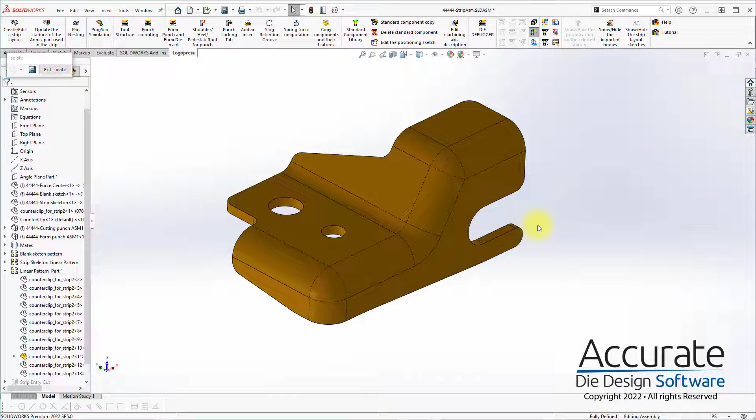So it's going to be a wipe of this main body. And to get there, we're going to start cutting it out. We've got a little Z preform. We've added this tab to the blank here, and to do that, you were going to bend that downward here to hang on to the part. Same thing on the back of the strip here, actually.

And then we're going to use those both as hold points to hold the part as we wipe down here so it doesn't pull everything. Then we'll cut that tab off. We will cam pierce our tab. We'll pierce our two slots, and finally we'll cut the part off.

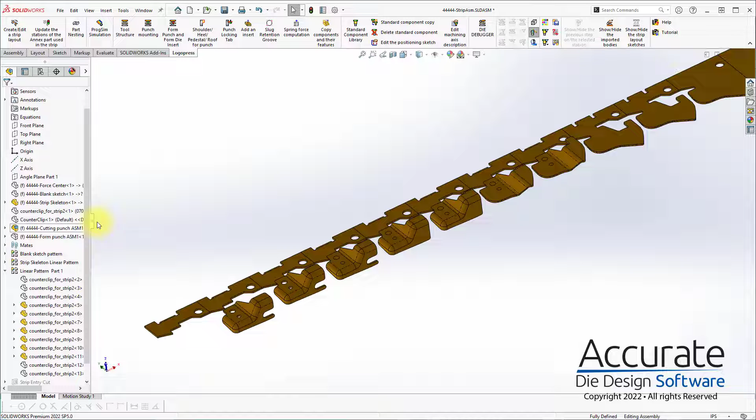There we go. Doing the cutting in just one main block here with little punches on the ends. These are just sticks for simulation purposes. They will, of course, be purchased punches later. And we've got our form punches here as well.

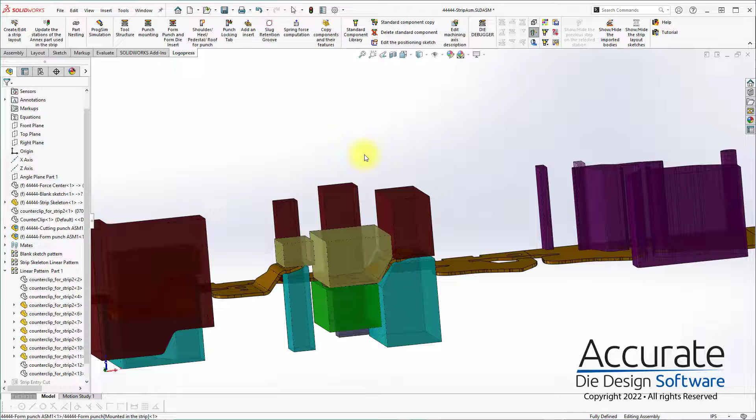The red are the form punches, the teal are the form dies, and then the yellow and the green are pads.

So we are going to start ProgSim. And it's going to go through all this strip here, and it's looking for all the stuff that was created in the Logopress strip layout.

And so it's going to be able to pick up that a lot of these form punches are indeed form punches, and the form dies are form dies, and that kind of thing. But we need to go through and make sure what it picked out is good, and add to it what is missing and take away what is not, as well as fill out some things it just doesn't know about.

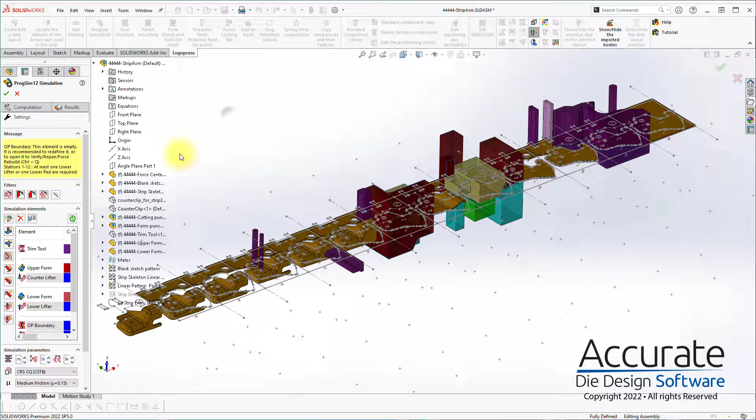That's fun. Let's hide. I'm gonna have to hide these sketches. Can I hide that for now? No, maybe not. There we go.

All right, so it's pre-populated some of this list, and then it's left gray on items it hasn't even tried to do. And then we're going to have to go through the side here and add a few more. But the main idea is that we are trying to incorporate all of the faces of tooling that is going to actually interact with the part.

Everything that's going to cut it or push on it, we want represented here because this is a real-life simulation right down to gravity. It's giving... We're going to kind of start at the top here and work our way down, kind of just like SolidWorks.

It's giving us some warnings at the top here, saying stuff's not defined, there's no lifters or anything like that. But there is not, then we can kind of come on down and we're going to go through the rest of the list.

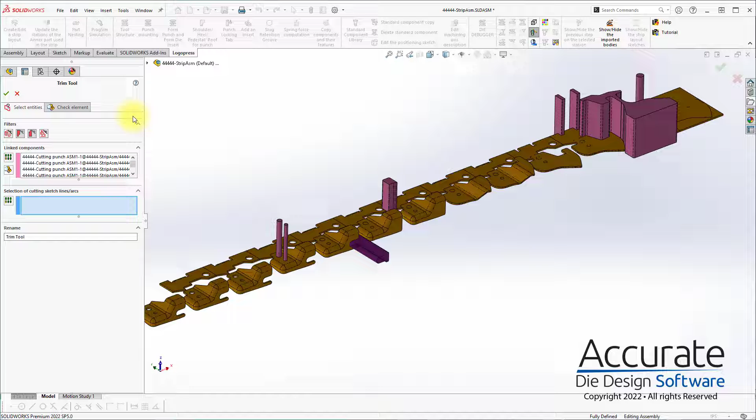So we're going to start with the trim tool, and it's picked up all these cutting punches. It's identified this cam punch is not a regular cutting punch, so it's not included it. We can go to the check element tab and see that it's doing everything that we actually want it to do. Those cutting punches are there, so we can confirm it. And we can come back to the list, and we're just going to keep on going down through it.

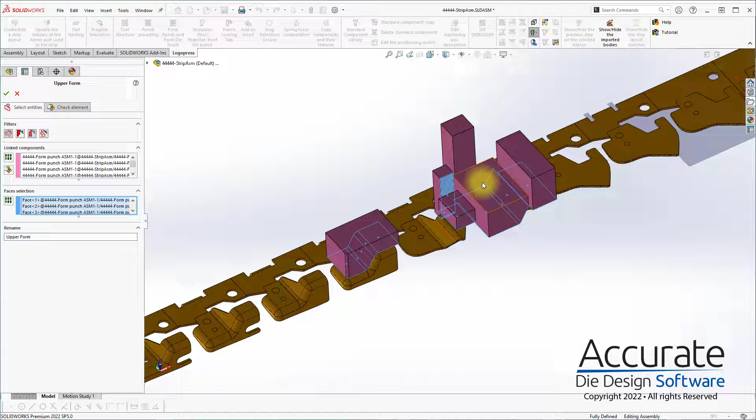Go to the upper form. It's picked up all of these bodies because they were all created with the form punch tool. And it's actually missed the big white punch here just because I think of the way that one was created. So we need to go through and we need to remove the pads from here. So that's a pad, and that's a pad.

And we are missing, we'll go into our tree here, one of these. That was made towards the end, is probably this one. Yes. And that. And again, we can go into the face selection here, or we can go into the check element and see that it's got everything.

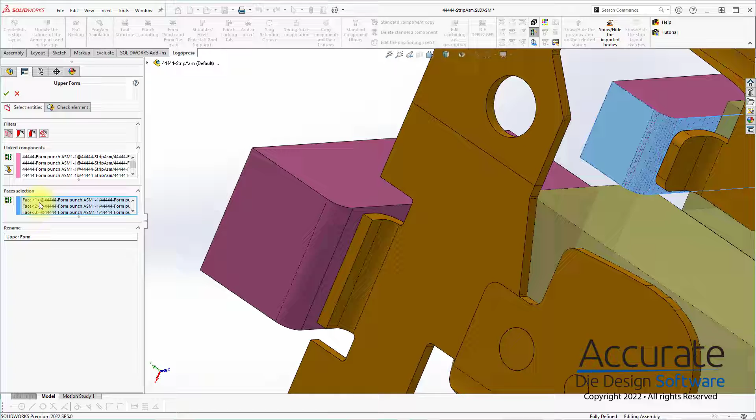This is good, this is good, this is good. This punch was missed entirely, so we can go back to select entities, we can pick up those faces into this bottom face selection area here. And we're looking for everything that's going to contact the surface.

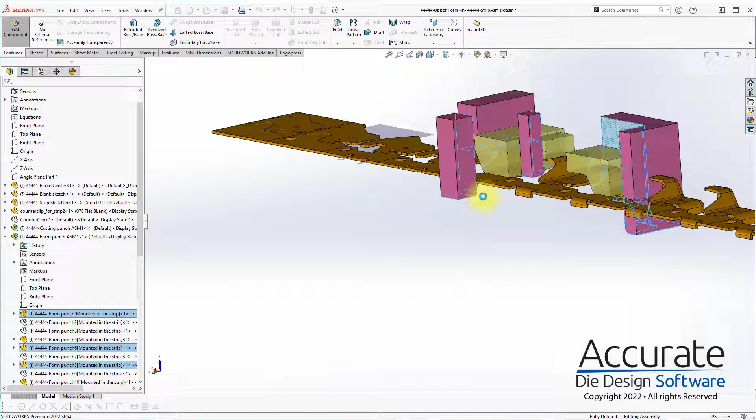Adding more is going to increase the computation time, but it will still work. You want to make it as minimal as possible just for the sake of performance. So we can make sure that those took. We do indeed have all of our punches now, and confirm.

I'm going to skip the counter lifter for now. I'll come back to that in a second. I'm going to do the same thing we just did with the lower form.

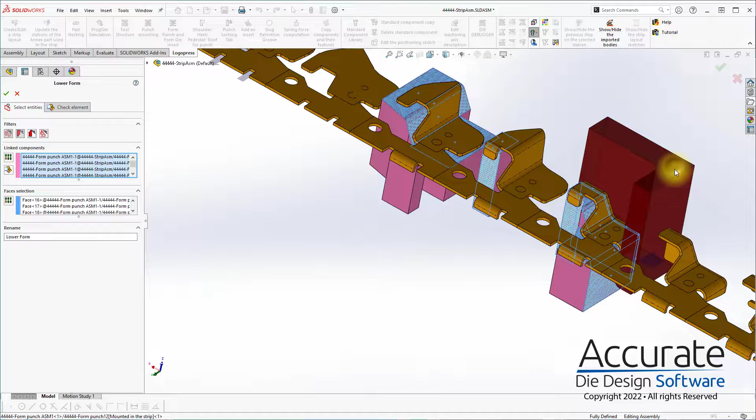This is where that form punch that we need for the upper is actually up here. So we're going to deselect that because that is, of course, on the lower. That's a punch. This is a pad, so we're going to deselect this.

And we can see here on the selected faces, this punch has not been touched at all. And I think I'm going to want this face here too. So I'm going to go into here and pick that, and we're going to get these three. And we'll check what we have.

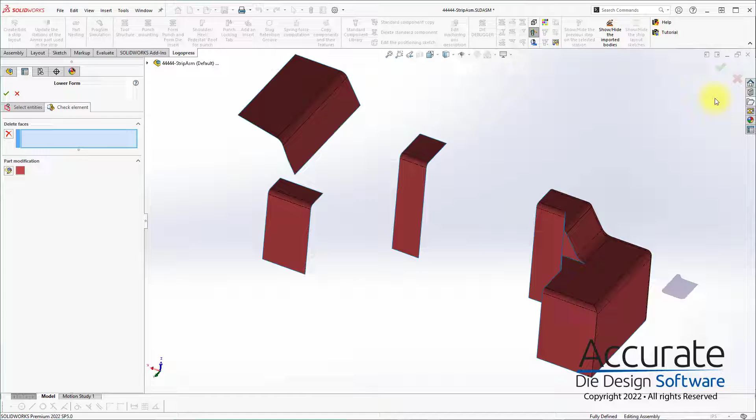This is good, that's good. If you were worried about the material pulling against this edge, you would definitely want this triangular face here if you were actually going to make your punch like this. But there's no reason for it to pull against that, so we're not going to bother.

It's not as bad as some of the old forming simulation where an open edge was basically a razor blade and it caught everything. We'll hit confirm.

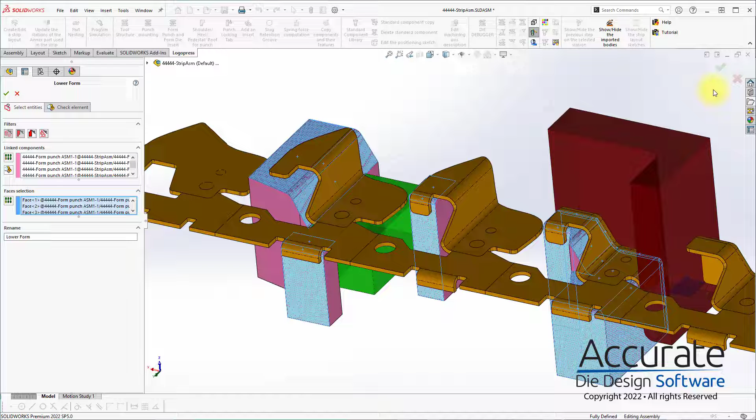We still need to do our pads. I'm going to do the counter lifter and the lifter right now. These two are linked. They're going to be the same thing unless you go in and try to mess with them, but there's no reason for them not to be the same thing.

So you can double click on either of them, the counter lifter or the lower lifter. Makes a lot more sense to think of the lifter though. The counter lifter is more just for the software.

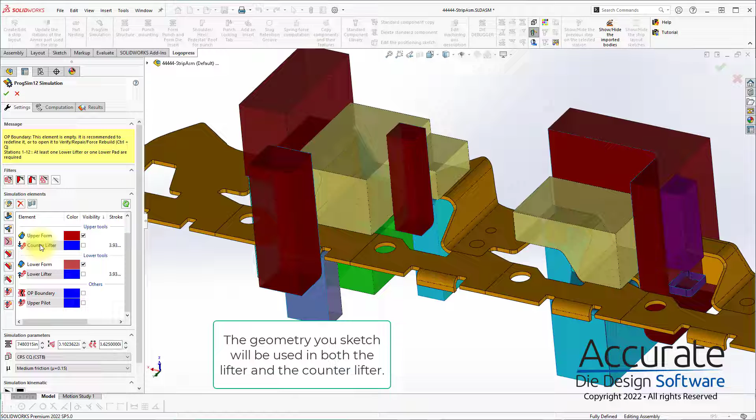It's going to pinch the material and hang on to it. It's mostly just a simulation tool, but it does need to be accounted for because it cannot touch the formed areas. It's going to ask us the first time what we want to call it. I can just accept, and then we can look at this, just use normal to.

And we want to draw a lifter here. We could go through and put little lifters where it's going to be, but it's easier and faster just to put a rectangle down on the carrier and say just hold on to the carrier. It does need to be on every single station.

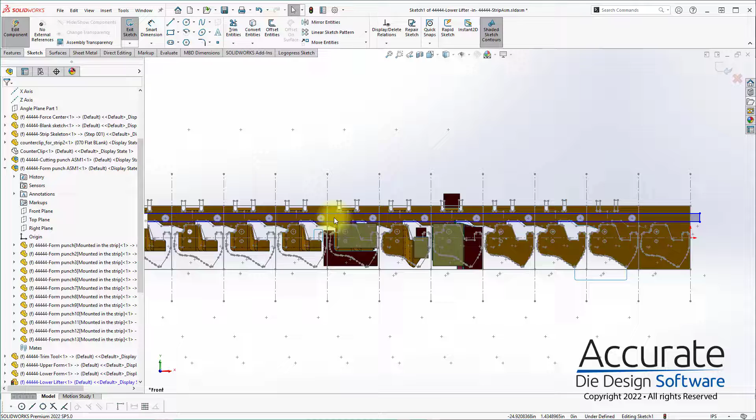It could use a pad in the lower and the upper instead of the lifter, but it's usually just easiest to put some lifter in, down past it on your carrier, straight down. It can be on the pierces where all the pilots are. It can go through cutting. It doesn't matter, it just cannot touch any formed areas.

So I'm going to put this almost out to the tab over here, and I'm going to put this almost to this tab over here, and it's just going to hold on to all the material it can. It'll make it more stable.

The only thing we have to do here is that there needs to be, in the first station, just for the purposes of the simulation, something on both sides of the center line. For this...

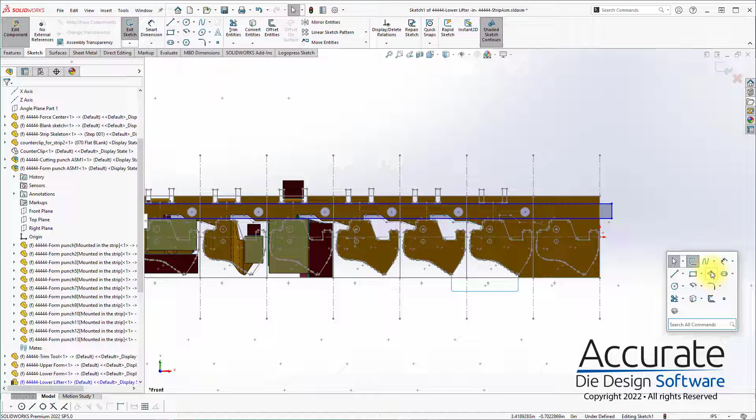Because the carrier is off to the side, it's not centered on the part, that means we need to add a second rectangle here in the beginning. We're going to stop it as soon as it starts forming though, just run it about there and that's fine. I could constrain this and all that, but frankly it doesn't matter.

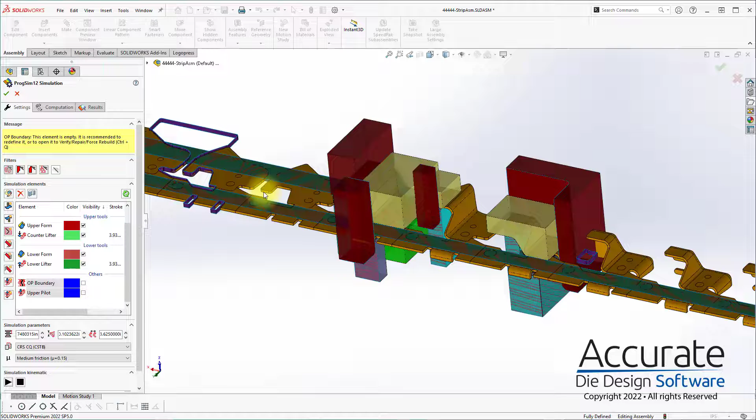So it's added our lifter here. You can see it's going through the cutting and that's fine. It ends before the form, and this one sneaks between all the forms. Real close there.

Last two things here in the tree is the operational boundary. I'm going to hit OK on the name here. This simulation is going to simulate your entire strip one station at a time, and so we are telling Logopress where to divide the part, where to have each simulation chunk be.

We could just make it a rectangle, and that's fine, and that would actually work for this part. But for more complex stuff, being able to define exactly where to go between the parts is better. We could, if we wanted to, run the boundary up here to try to include this pilot with this station, if that was better for what we were doing, depending on how we thought it was going to pull.

But we're not really too concerned. The one thing we do want to do here, though, and again this is for a simulation thing, is that we want to have a little jog in the line somewhere in the carrier, just to kind of lock it together. This is just a simulation thing, and I'll show you what I mean as I sketch here. So this is going to be retained here and locked here.

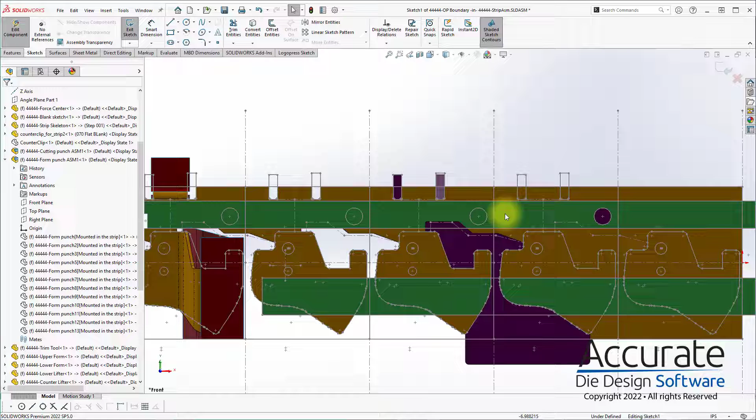We're going to keep it back with that. I could just go straight across here, and I do want it to be the full width of the strip. This is also going to define the width of your material in the simulation, so if your line was short, your material would be narrower. If you wanted to make your material narrower or wider, you could make this line shorter or wider, and that's fine.

But the only thing we're going to do here is make sure that we have this. I'm going to go well back from here, so we're going to put a little jog in here in this carrier area. What I mean is I'm going to go over a little bit, come back a little bit, then go down, and there's now a jog in here. I could even jog a third time if I wanted, and I just kind of want to come through between these, so I might as well.

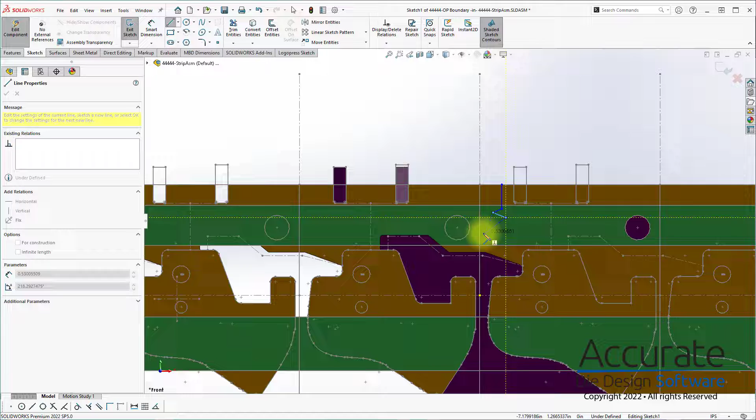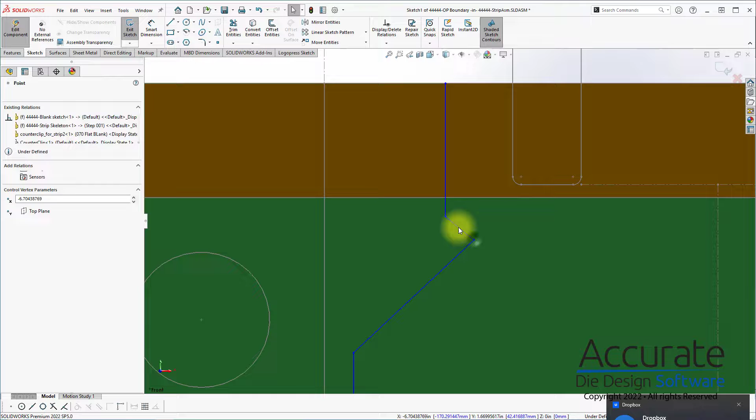But the idea is that somewhere in this carrier, we need to prevent it from slipping. It might be a little cleaner if you want to be perfect - we could come in and we would only need the one bend this way, so that might be the better way to do this, a little thing like this. It doesn't need to be any particular dimension. I could probably make it really tiny and it probably wouldn't matter. But we're just trying to create a divider here between the two, and we need something to trick this into not moving, so I'm trying to put this little divider in between.

Oops, we don't want you. Come on.

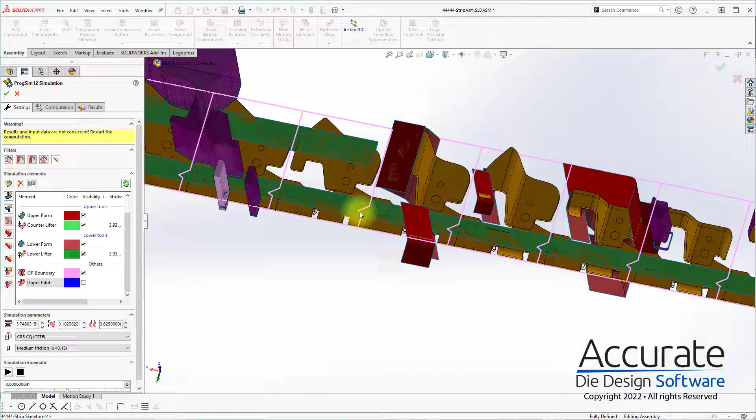I want this somewhere in the carrier - that's all I'm going to do for it, though. That's one of those that only matters when your part is only carried on one side, because of gravity this part would tip without this little lock here, and you can actually play with that and watch it fall off the carrier or off the lifter if you want.

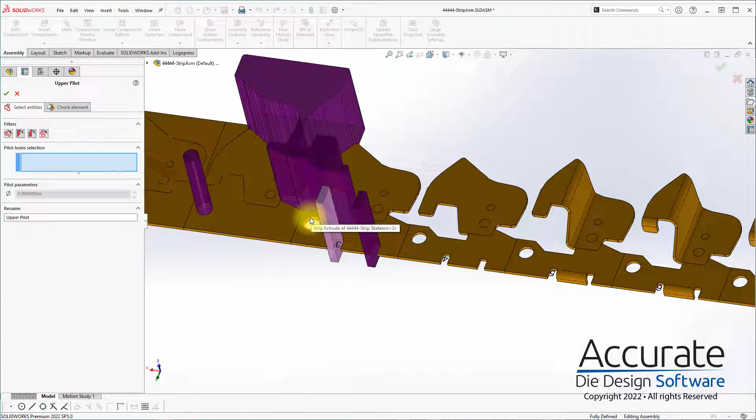Okay, the last thing here in the list is the pilots, and this is just asking for a hole where the pilots are going to be. We're piercing our pilot down here, and it's got a feature here. If I hold Control and then select the edge of a patterned feature, it's going to grab all of those patterned features until they stop existing or are changed, and you can see it goes all the way down here because there's nothing interfering with these pilots the whole way.

We can go ahead and hit OK. It's picked up the correct size from all that, so it's nice and automatic there. You could deselect if you don't want to use it in some stations and all that, but those are now there, and so we've got all the basic features that it's asking for.

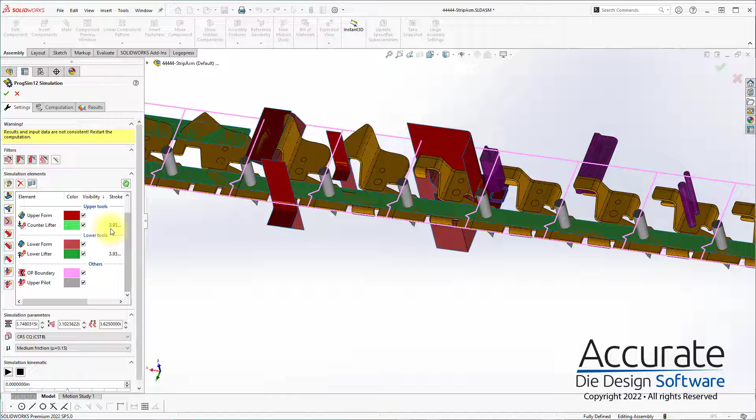We still need to put strokes on for the lifters, but more importantly we need our pads here.

I'm going to add the upper pads first.

The pads can be done individually if you want, or they can be done all together, regardless of whether they're bolted to a single stripper or something like that. It's still going to be computed individually, so all the forces are still going to be individual, and you'll still have to put them together. So there's fundamentally no difference as long as you're making the same style of pad.

In this case, these two pads are pushing against form dies beneath them, and so they could be made the same, in the same single punch or same single form pad, or they could be made separately and it'd be fundamentally identical. This pad, however, is pushing against this lower pad, so it's technically a different type of pad, and must be made separately from these two. So I have the option of making this one pad, and then I could either make one pad that includes these two, just because it's faster, or I could make them separate if I had a reason to play with them individually, put a ton of force on one or something like that.

So we're going to start just at the beginning, strip work down in order here. We're going to pick the component we want - it's smart enough, you see it picked up those faces on the bottom here in this list. We're going to tell it how much the stroke of this is - it's got an inch and 5/8.

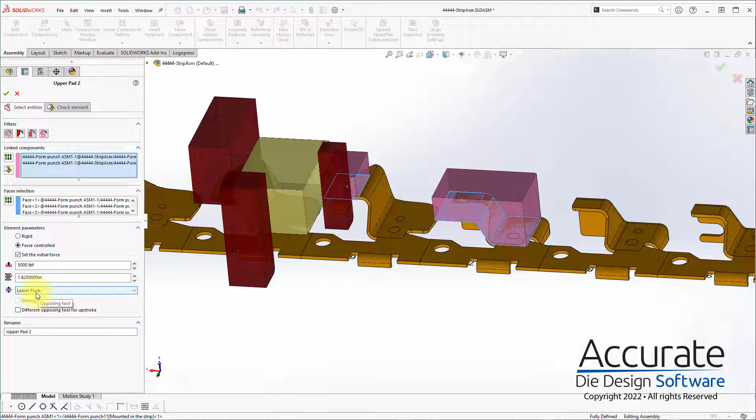And then finally, we need a pad on the bottom here that's going to hold this as we go down. So we are going to go into the lower form, or lower pad element, and we're going to grab this block. It's got that face automatically.

This is only going to get 1,500 pounds. It's got 7/8 of an inch of travel. Nope.

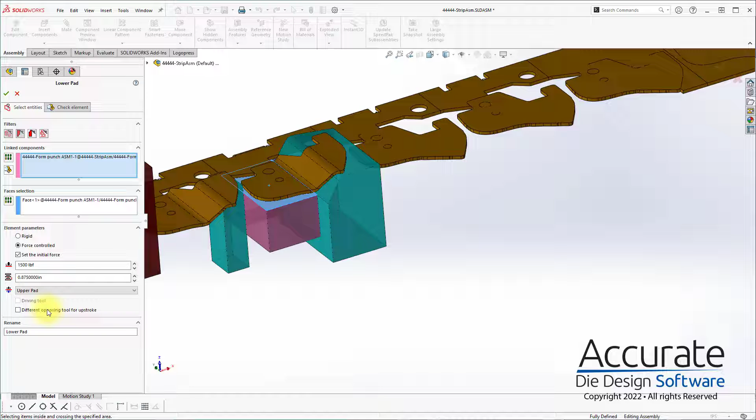And this actually picked this up already because it's directly above it, that it's going to be pushed by, or it's interacting with the upper pad. It is not the driving tool, so it's smart enough to do that. And this one is now good.

So the last thing we need to do here is go back to this upper pad. We can just double click. And this now has our lower pad here to push on. It switches to driving. I was smart enough to do that now, so that's cool. And we can confirm.

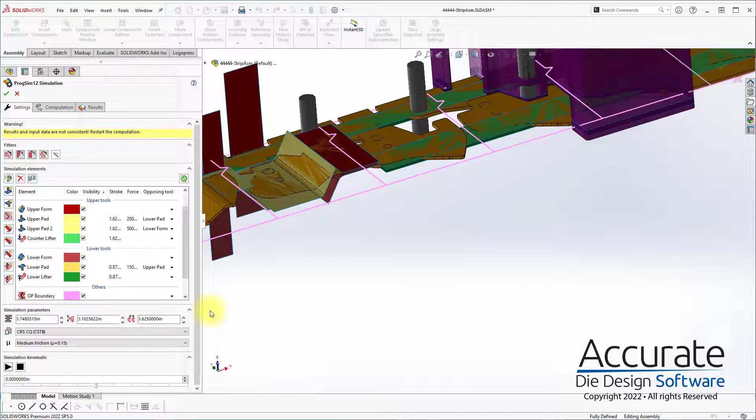The last thing I'm going to do here is make our lifters just match the pads. That's the easiest thing to do. There's sometimes when you might not want to do that, but when you can, it's the simplest and most straightforward, and you'll find out when it doesn't work.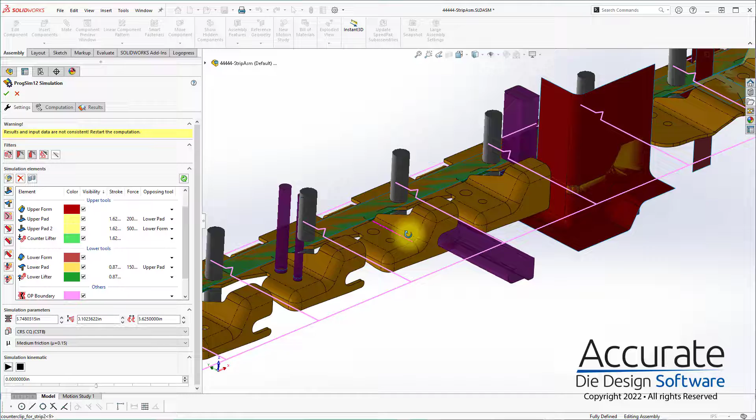But be aware on the forming ones, it says upper form and lower form, but it is not talking about being lower as in attached to the lower assembly and upper as being attached to the upper assembly or the top half of the die. It is talking about which half of the, or which side of the material it touches. This is especially critical on stuff that you bend all the way over.

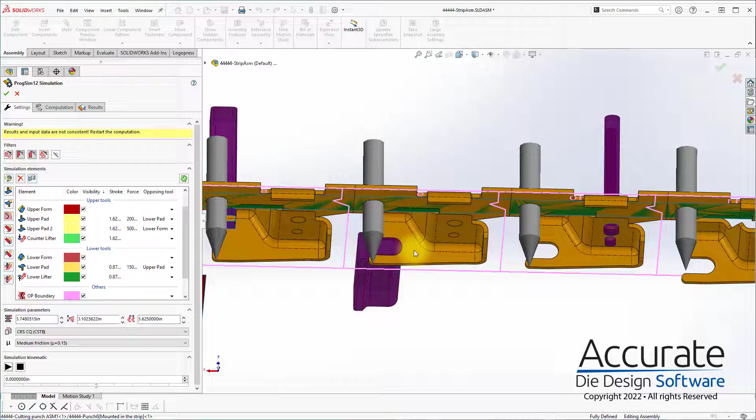Because this is the top side of the surface, something coming from the outside would be an upper form. Whereas if I was coming from this side and I was hitting this side of the material, it would be a lower form because this is the lower side and it's tangent over the way to the lower. So this is the lower form here. Just something to be aware of if you're doing those forms.

But back to this one. So we are going to add our cutting cam punch. And we'll pick the body, and we'll see if it picks it up here. Oh, we need to select the plane perpendicular to punch direction.

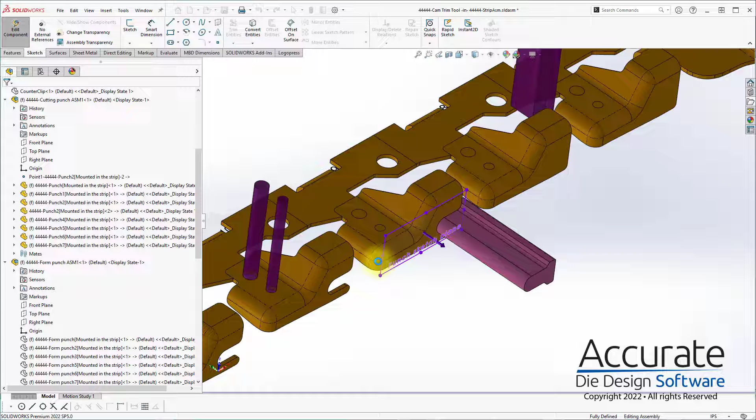You can usually just pick, actually it's convenient. If you make it with Logopress, you can pick the plane for it. There you go. Otherwise, you're going to have to pick, it's better to pick a plane, but you could pick the face of whatever you're cutting, especially if it's coming in at a fun angle. We'll see if it picks up the sketch of that punch. It does. So we are good to go there.

See how I flip that arrow by clicking on it, signifying punching direction. We'll hit OK.

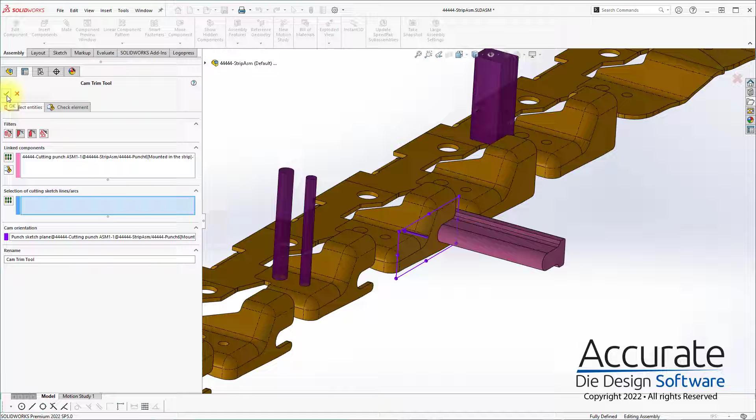And last we have some parameters down here. There's the press stroke, around 6 inches. Picked up our strip material thickness and our stroke. This is just cold rolled commercial quality steel right here, and the medium friction is going to be your correct choice the vast majority of the time.

You're going to be doing some really high lubrication to get in the low friction zone, and some really aggressive nasty stuff to not have any kind of lubrication at all left. Yeah, you'd be running dry for sure.

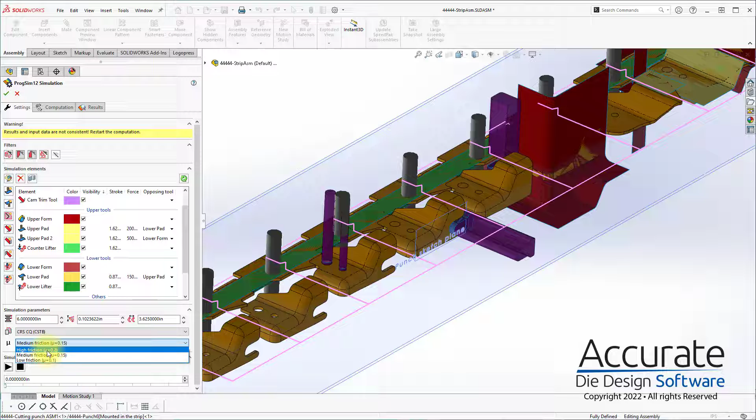Last thing here is the kinematic. We can put it in motion, make sure it's doing what we want it to be doing. See here, my cam cutting is actually coming the wrong way, so I'll go in and change that. We can see our pads and everything are traveling how we want them to.

So pause that. Go into my cam trim tool, flip that arrow that I hit before. Let's try that again. And we'll hit play. There we go. All right.

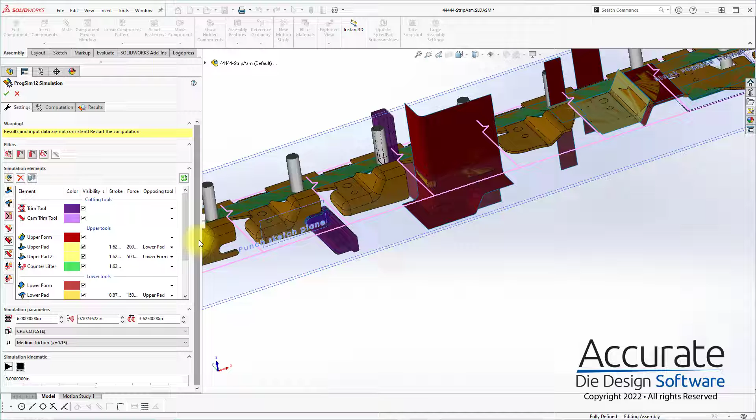Believe we are all set up here. That data not consistent just means that basically the results don't match the simulation stuff, and the fact that there's no results definitely doesn't match what it's got here then.

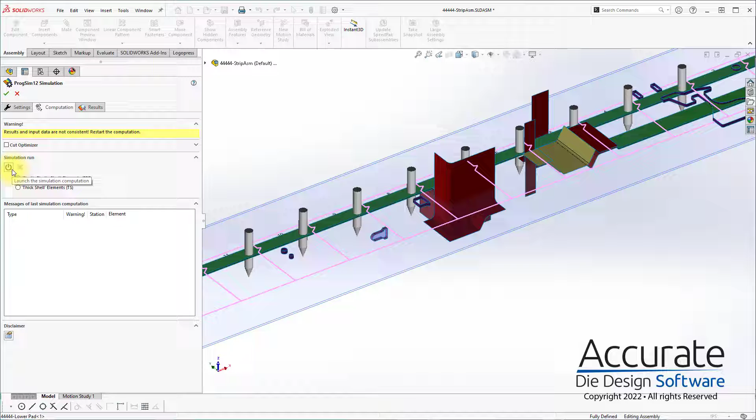So we are going to go ahead and launch, and assuming this works out, we will dive into the actual use of ProgSim's cut optimizer to change this blank.

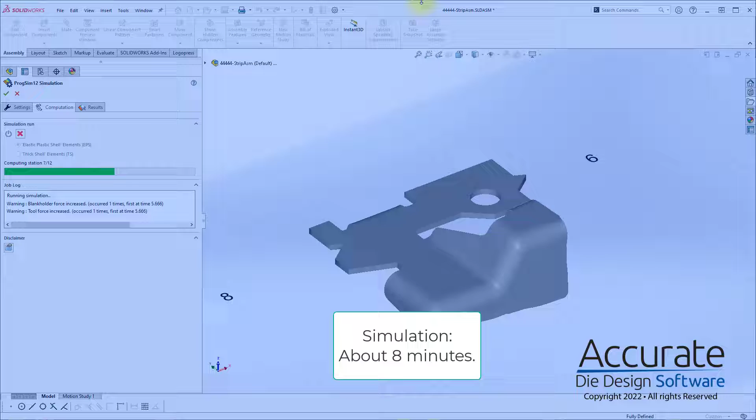Alright, so our first results are in. Looks like our punch is missing the end here just a little bit, so we'll need to shift that. But see our initial guess at a punch here, a little extra material pulling in that corner. We're trying to get that to come straight and straight. So otherwise, the simulation works. So let's go fix this punch.

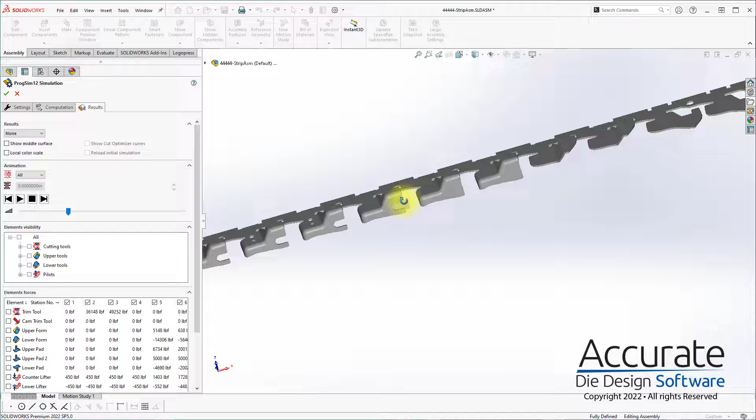And then let's get the punch optimizer running. Well, first, let's take a look at some of the results here. You have this menu to display 8 or 10 or whatever different results plots on here. The formability is your most basic one.

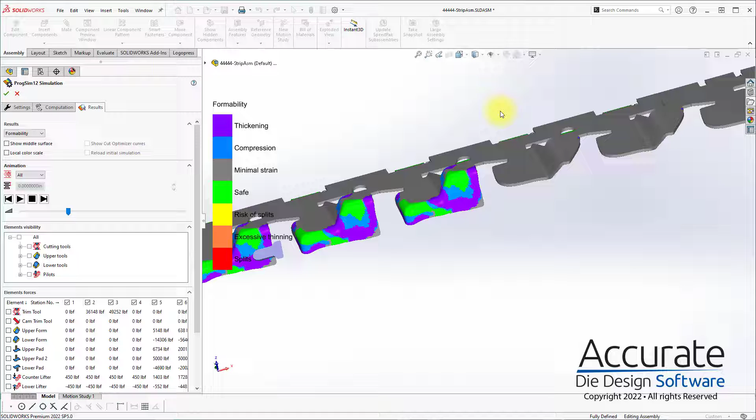This is the standard. This is great to show people because it's very finite. Can I get it onto a light spot here? Very finite result. There we go. They're just color categories. There is no wishy-washy betweenness here on the colors.

It's purple, there's thickening going on. It's blue, there's compression. Green is safe. There's a little bit of stretch going on here. It's going to hold this shape real well. Risk of splits is getting pretty aggressive. Thinning happens more on the high stretch materials, and of course splits. There is no red here, so that's nice to see.

Have a thickness. Show you 74 thousandths at the thinnest spot and 120 thousandths at the thickest. Can also do that as a percentage.

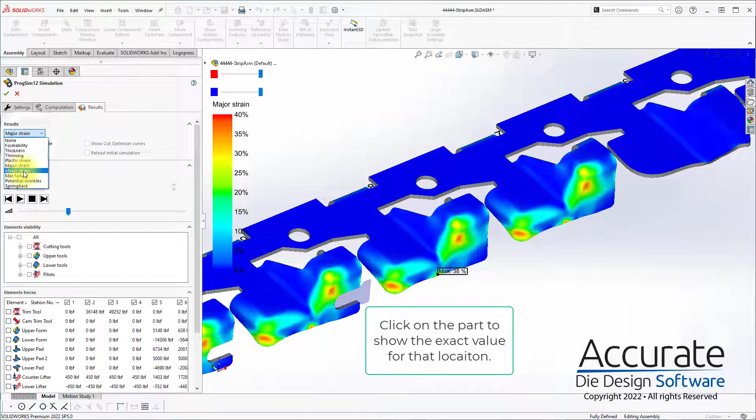It's plastic strain, percent of material that's actually deformed beyond springback. Major strain, stress of the material in the main direction, and the stress in the minor direction.

Together these come up with your wrinkling factor. That's where this chart comes from here. Predicting there's potential wrinkles here up to 0.03 on the scale, which is not that high. This doesn't mean that it's going to be wrinkled and folded over. It just means that there's forces in the area that are going to try to do stuff, and you'll often see the results in the surface not being perfect, assuming it's tied down well enough not to actually wrinkle.

This max failure that I skipped over is actually the partner to the formability. So this is the very cut and dry, this is what it is. This is the numerical value of what this is. And it's going to show a chart pretty far through here as far as the failure and the splits go.

1.0 on the chart is a failure. So the fact that it goes to a max of 0.84 means we're not going to fail this part, and that's fine. But you can get a better idea of how close you are to failure. At 0.8, you could push this a little farther and you'd still be fine. It's especially good to know when there is failure, is it a 1.01 or a 1.2 or a 2.0? You could come back from something close, but when you get up past 1, 2 or so, you need a new idea rather than just some massaging.

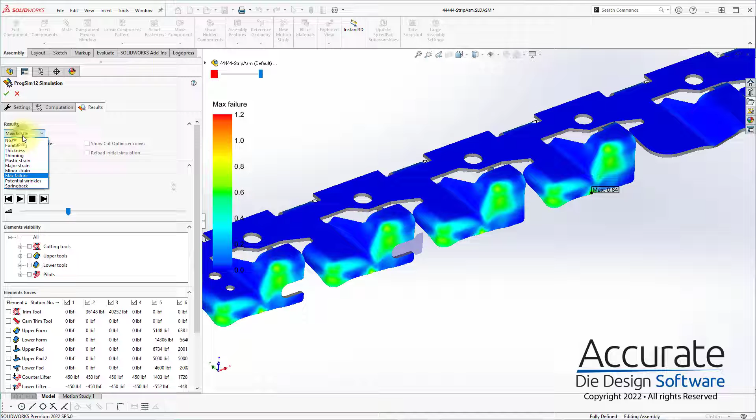And the last plot here is the springback. It is showing the local springback on that station. That's why you see more springback here than on this station. It's just what's happening in that station as the press closes and the forms come back. And this is also compared to the closed state of the tool, so this is not measuring from your finished part. This is measuring from what this was when the die closed to the die opened.

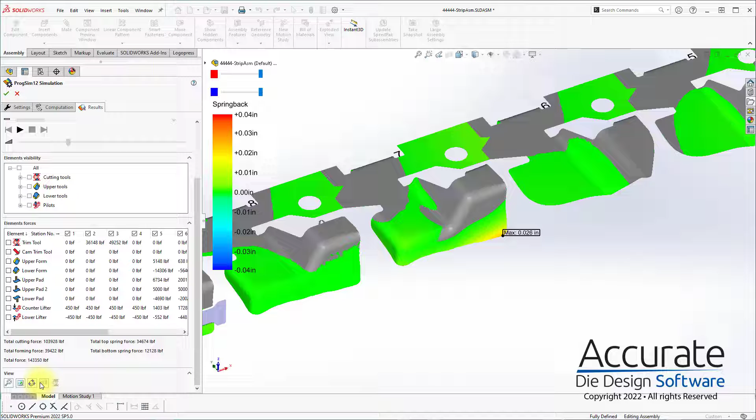You can align the part with these springback adjustment points. This is kind of like on a check gauge. We can say that the carrier here is going to be flat, and it'll align the part to show you, if these three points are on the surface plate, where's the rest of it. So we could do that again, align it using these as our reference points. Reset. So we can come and adjust, and that's now our reference point, and that's going off. Makes more sense on flatter parts where you're going to have that kind of thing.

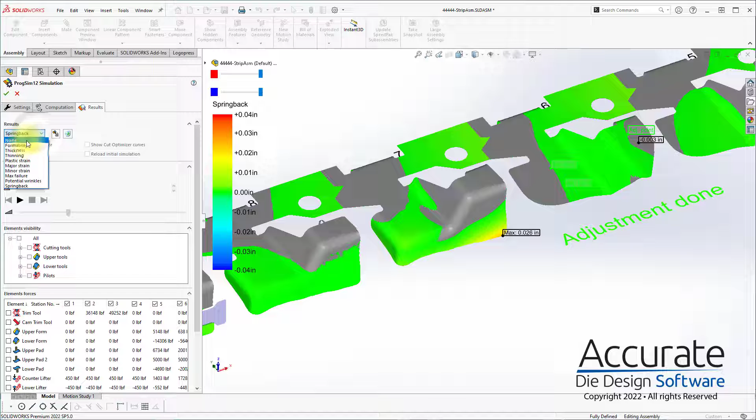There's 2 main display styles. The show middle surface is the actual mesh that's being simulated, versus we can have it show an approximated thickness for what it is. It will actually make this thicker and thinner going through here, but this is just an approximation. This middle surface is what the real simulation is running, and it's accounting for the thicknesses.

Local color scale will adjust your chart here. Let's go to max failure, this will make more sense. So the default is 0 to 1.2. If you do local color scale, it'll show you your maximum is about 0.8, 0.84. So it's just going to go from min to max, and you can see the range is a little more extreme now that our max is 0.8 rather than 1.2.

Also useful for like thinning. New local color scale, and it'll adjust it to match.

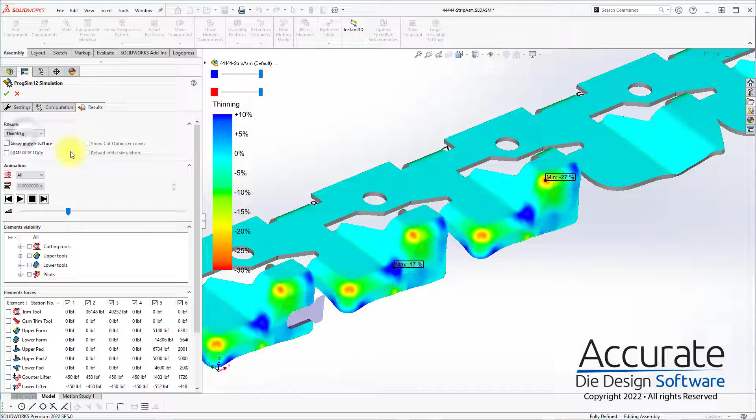These last 2 are going to be used with our cut optimizer. We have a play option here. We can either ask it to begin playing the die at the first station and simply go through everything. There's a speed toggle here so we can go a lot faster, and we can watch it go through every single station.

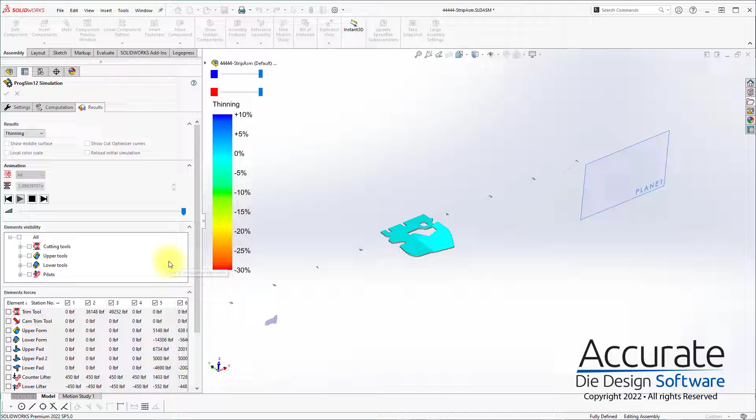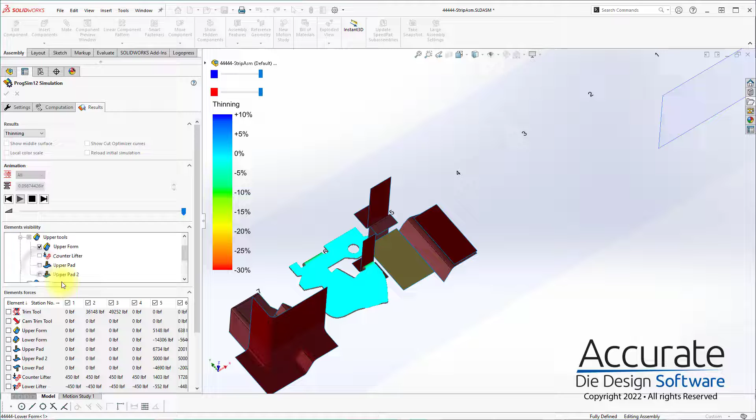Toggle your tools on and see what it's doing. You can go individual tools too. You don't need to see the lifter. Turn on your upper, get rid of that lifter. Turn off that pad. See that getting wiped through there right now.

So like I said, you can either let it go through it all, or you can just pick an individual station and hit play. It's going to start from the bottom, lift up and go through the lift cycle, then go through the drop cycle. It'll keep going through this, get to the bottom, and just lift up again, showing you that one station.

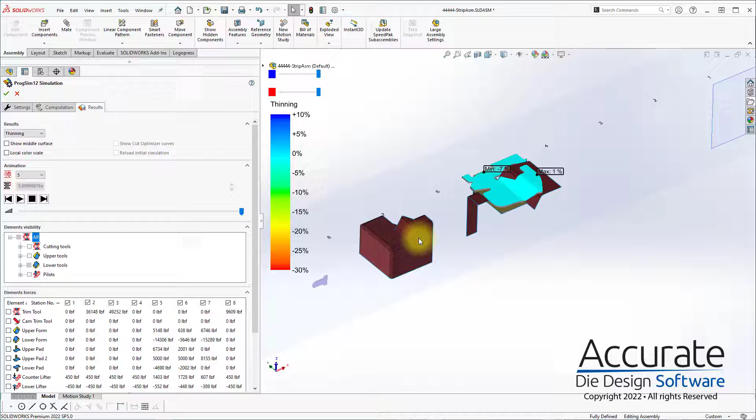So that's how you can display the tooling here. You also can display forces for the tooling. Go on the lower form here. If I check that, it's going to show how much force is on the lower form. It's 15,000 pounds

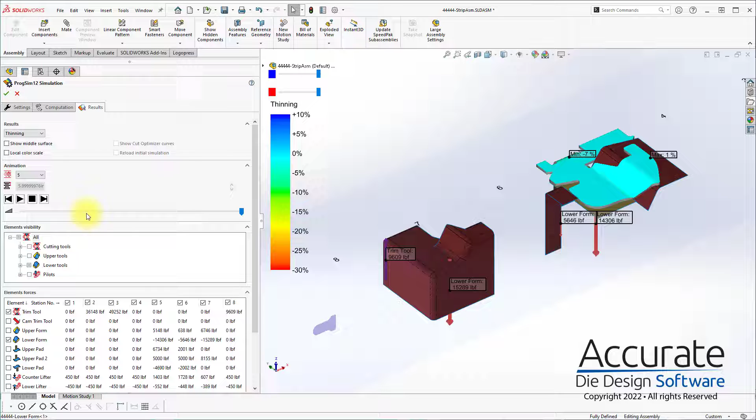All right, so let's go, we're going to stop this, and we're going to confirm. We're going to go fix that punch.

Oh, what do we need? Let's do... should have measured it. That's more than we need. Let's try that. Close enough, right?

Okay, let's save what we did.

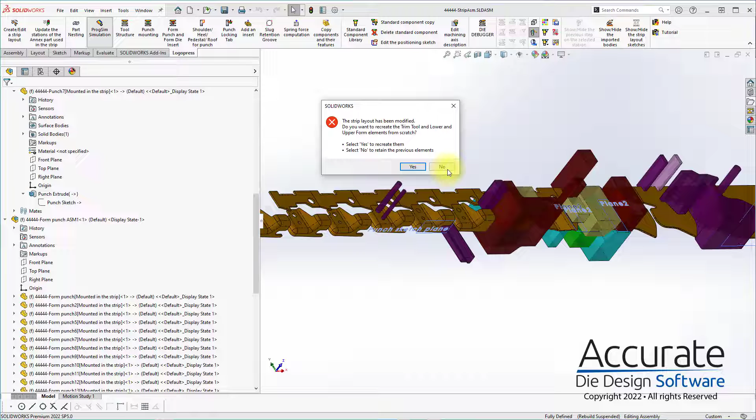It's going to ask if we want to recreate everything, and frankly this warning is dangerous. We do not want to throw out everything we did and recreate, so we're going to hit no. We're almost always going to hit no, unless you're planning to start from scratch. There's no reason to ever hit yes on that button.

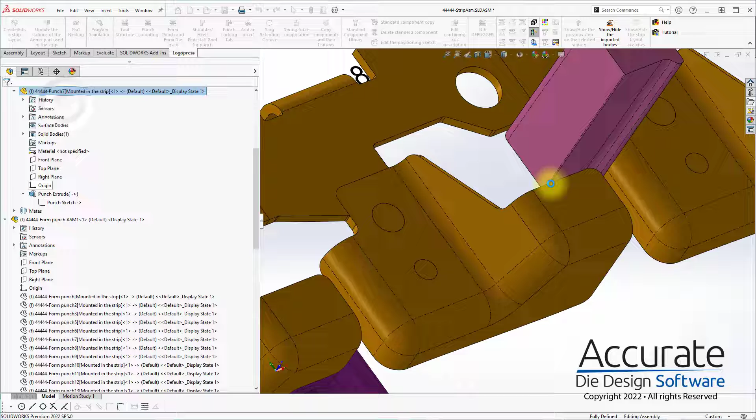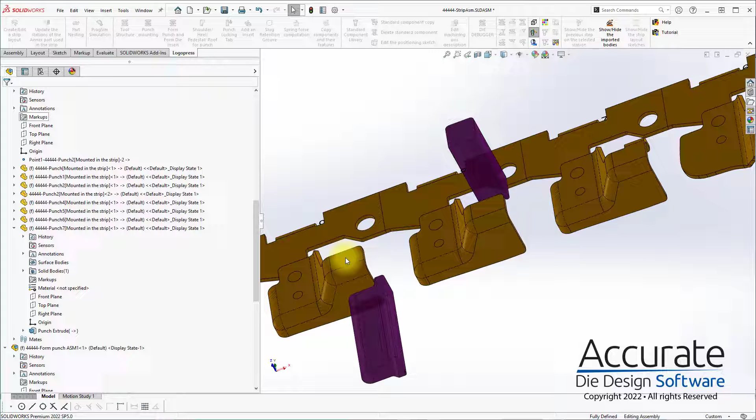I can't even tell, can we measure it? We can measure it. I think so, I don't know what it's supposed to be. We're going to go ahead and assume it's good. If not, there's extra material up there, and that's fine.

So we're going to go into the computation tab, and we're going to use this cut optimizer section up here. We're going to expand this, and it jumps to the last station. We are actually going to come over here to station. We want to do the station after, so we want to optimize this form.

It wipes it down and we're trying to optimize this. We want to go to the next station because we want the die on this to release, and this is being taken at the bottom. So we want to come over here to station 8.

Going to hit the create tangent lines thing, and it's going to go around the skin of our part and create a sketch.

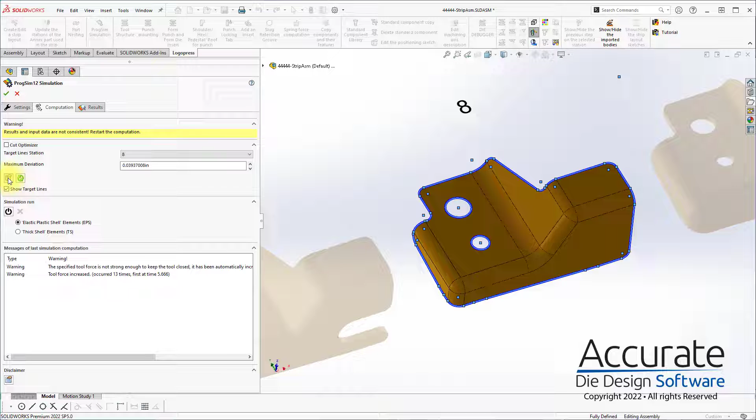And we're going to go into this again, click it a second time, we're actually going to go in and edit the sketch. We are going to ask it to optimize the whole outline, basically from here around the edge up to, I think we'll ask it to include here.

So we're going to go here to here. We don't want it to mess with the rest of this because it's just basically cut flat and it's fine, so we're going to delete that. I'm going to delete that, and then I can just select this chain and delete. And we're going to grab these two as well and delete.

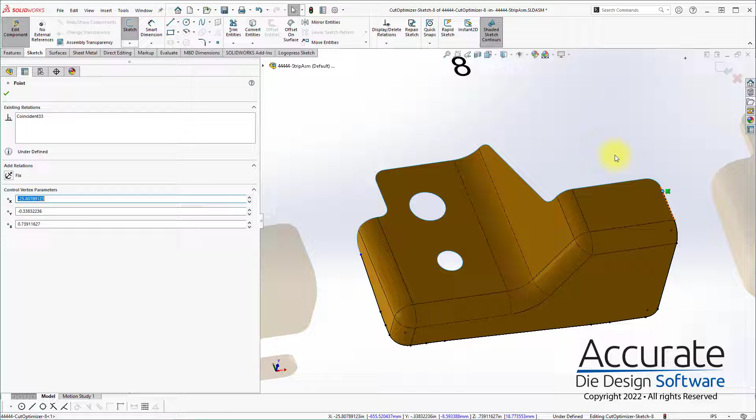I'm going to drag this back just a little bit from the corner, and this one too, just a little bit from the corner. And this is just another software thing, it doesn't like going right to the edges.

So if you pull them back a little bit, it works a little bit better. That is a 3D sketch, though. You can do just about any 3D sketching geometry you want in there and modify it if you had something in your blank you didn't like, but ours is fine.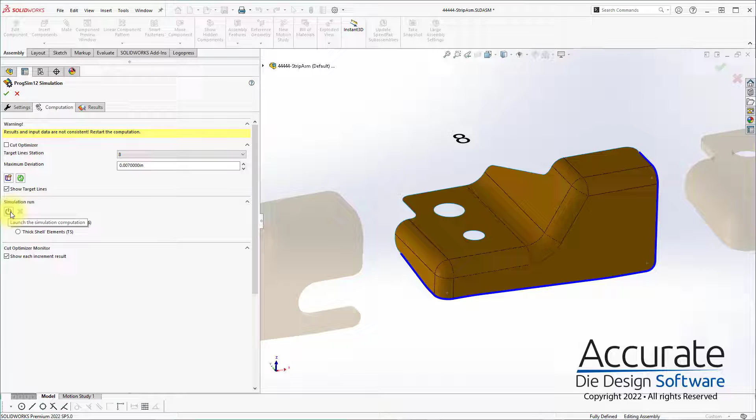We're going to set a deviation level here, so it just defaulted to what I used last time, which was 1 millimeter, and we are going to give it, let's try 7 thousandths. We're going to ask it to try to get this edge within 7 thousandths here. So we are going to hit run now that we know our simulation works and set up our edge.

Alright, we have the results of our optimization here. We can see the tweaking it's done to the shape of our cutting punch here, between current and the initial. A little hard to look at, but you can swap again. Yeah, you can see a little bit. And anyhow, the result is pretty straight here.

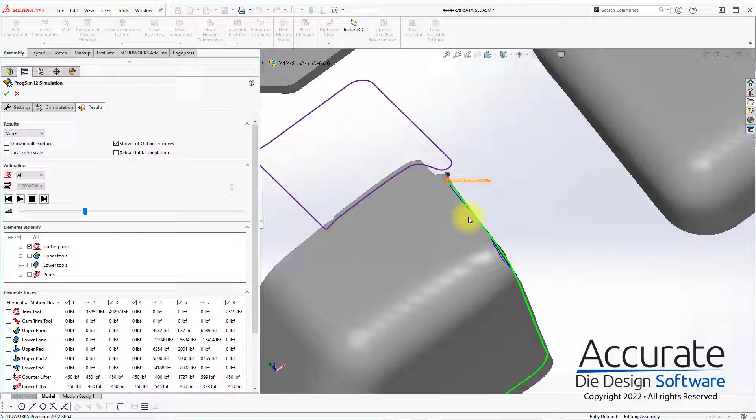Let's see. Tell us how far we are. Yeah, within a few thousandths on most of it. The same. Yeah, it's off by 8. No, yeah, just here on the back little corner. Pretty good though.

Also look at our forces on our pads and stuff here. You can see the lower pad got more force than we put on there, so it bumped it up a bit. So something to keep in mind: your forces that you apply versus what it actually increases it to, what it actually needs. So the upper pad put 6,000, I put notably less than that on there, and I needed 8,000 on that second pad. So both of those should be bumped up.

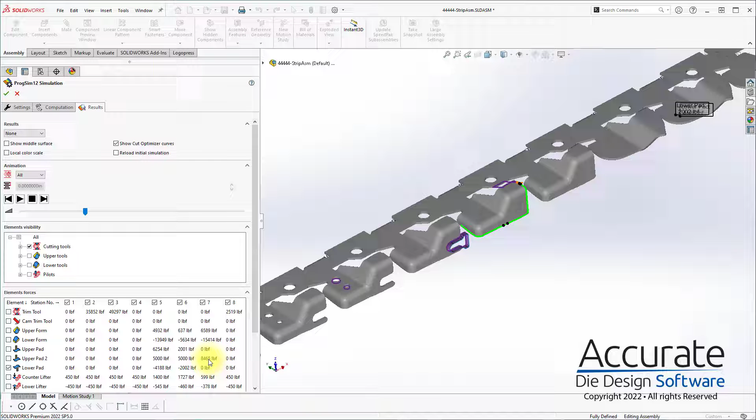And ideally you would use these values next time you simulate. So you would want to go back and punch these in to your forces here. The upper pad was like 5,000, the second one needed like 8,000, and the lower pad was like, what was it, 4,000. So it would need that.

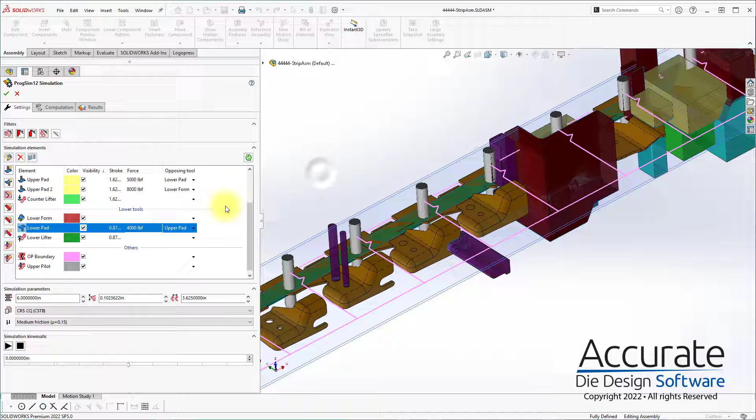And then the other thing we got to do here is we actually got to update our cutting geometry. There's a little tool it gives us here if we go into the cutting punch here. I'm just going to edit it in context and look at the sketch. So we've got our actual geometry here, but now we can bring in the optimize cutting punch outline command. It's going to bring in a polyline for it, which is basically a mess.

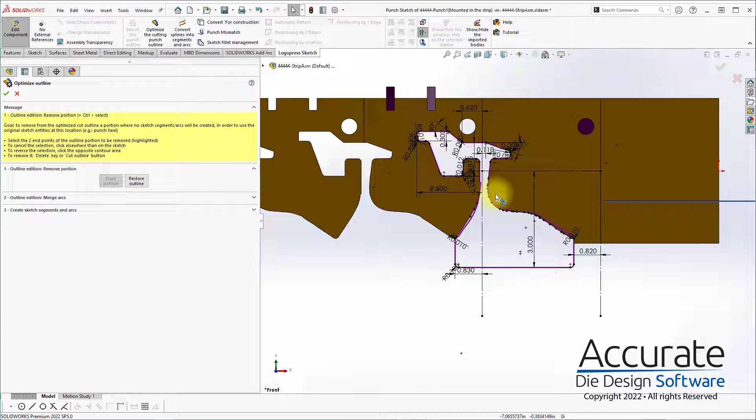But first thing it wants us is, do we want to use the whole thing, the whole pink thing? So do we want this outside? You can trim it off and reuse your geometry from before, or you can just hit confirm and just let it update to your new geometry, and that's fine too.

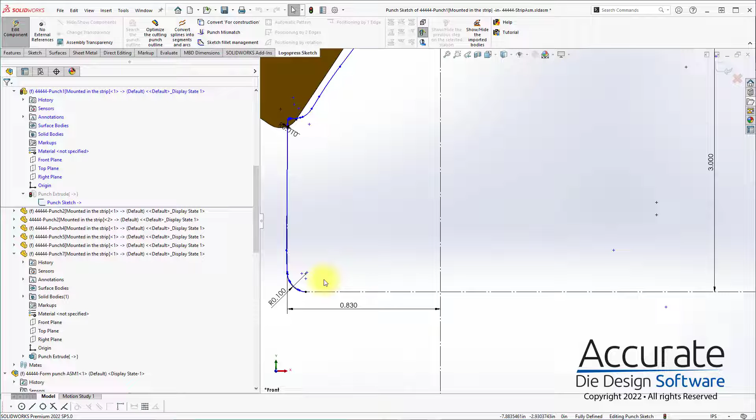It's more important to maintain your back geometry here. If your punch is already in a tool, you would definitely want to maintain as much as you can. Or if you're already at the end of your process here, you'd also want to maintain that. But frankly, if we're still refining our die here, it's okay that it's not perfect.

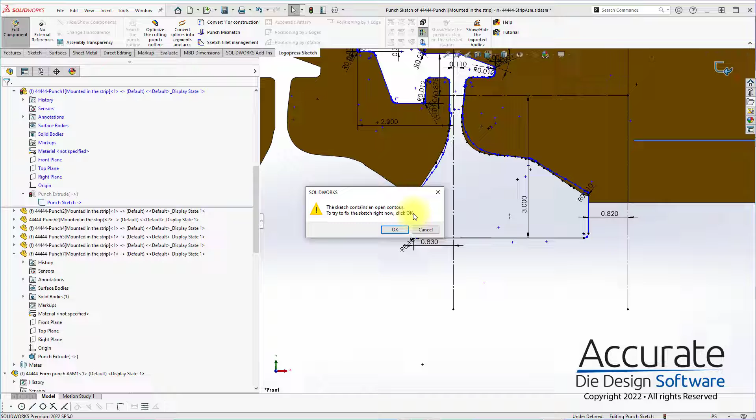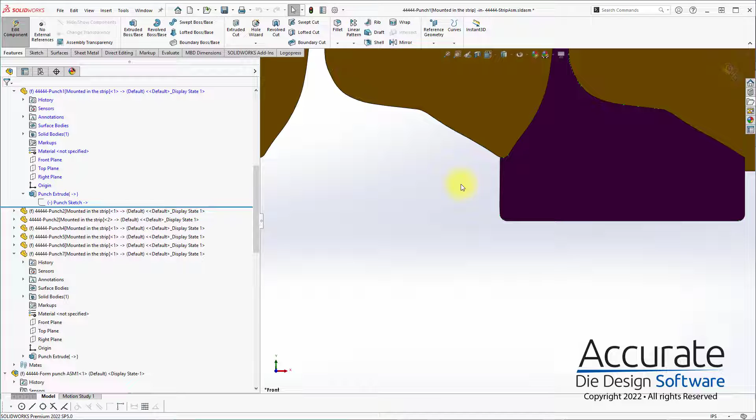There we go. Alright. So now we got our new cutting punch on there. As normally, if you don't cut right on your skeleton, you're going to end up with schnibbles in your punch.

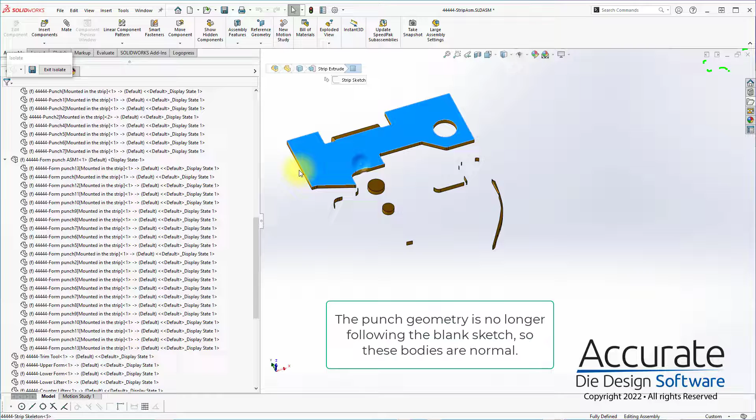So the one thing we're going to do here is I'm going to isolate. Oh, gotta get out of this first. I'm going to isolate this form station here, or the skeleton of it. You can see all this little stuff. Just we're not quite on it anymore. So what I'm going to do here is going to go into it.

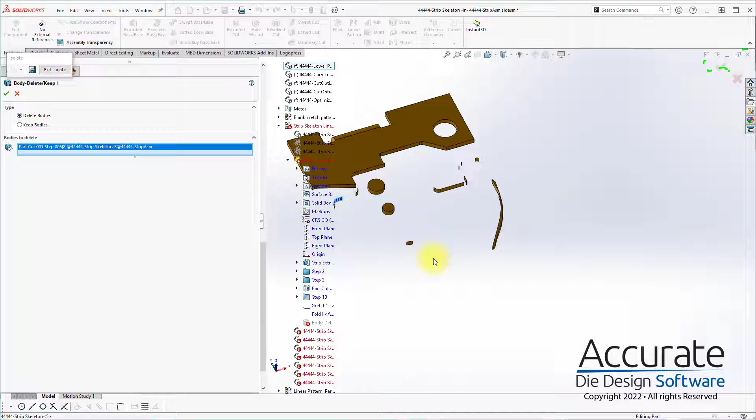Looks like I was already trying there. So we're going to change our body delete. Yeah, this must have been for the first one. And I'm going to pick. Where are we here? Strip skeleton pattern. Alright, solid bodies.

Clear this. So I picked all that, and then I'm just going to depopulate the 3 that I actually don't want, and hit delete. And then lastly, oops, we can get out of exit isolate. We can get out of edit. And yeah, alright, so we're already good there.

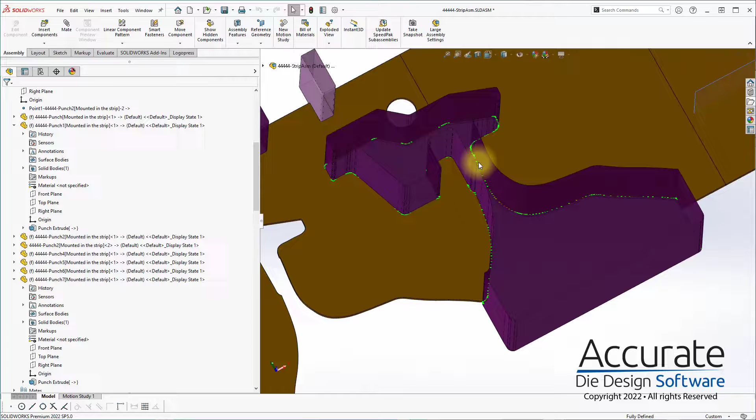So now you can go back into the simulation again and use this new optimized punch here to refine it more. We can get closer than the 12 thousandths or 8 thousandths or whatever it said there. You could run it through again. You could go through this and optimize the shape of this and get all your lines and curves in there with the optimizing command, or just change the backend to make sure that works better. You probably want to check your punches over, but that is the idea. And be sure to save.